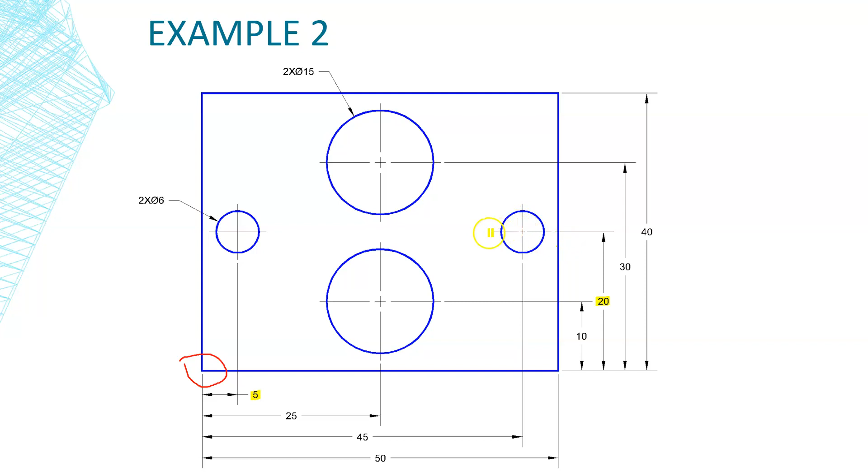Because you can see that we should be able to get to all of our rectangular dimensions without any problem. So if I wanted to put in my first circle, for example, I can see that that is actually a positive number. It's going to go 5 to the right and go up 20. Now, this is one of those things that you kind of learn throughout the course of drafting, is that anytime you see that there is a single number here, that number is implied to be extended to both of these. And sorry that my line is crooked.

And it's going to be the same with this number 25. That extends actually up to this circle that's above as well. So you don't really need to put all of these extra dimensions on your drawing saying that, hey, I have this over here and this over here.

Another common practice that you're going to see is the use of the diameter symbol and 2x in front of it. So the 2x means that no, it's not a multiplication thing. It's saying that we have two of those. We have two circles that have a diameter, and that's that funny looking symbol here, that has a diameter of 15. So these two big circles here are going to have a diameter of 15. And then you have it again where it says 2x, diameter 6. So we have two circles with a diameter 6, and those are your two smaller circles.

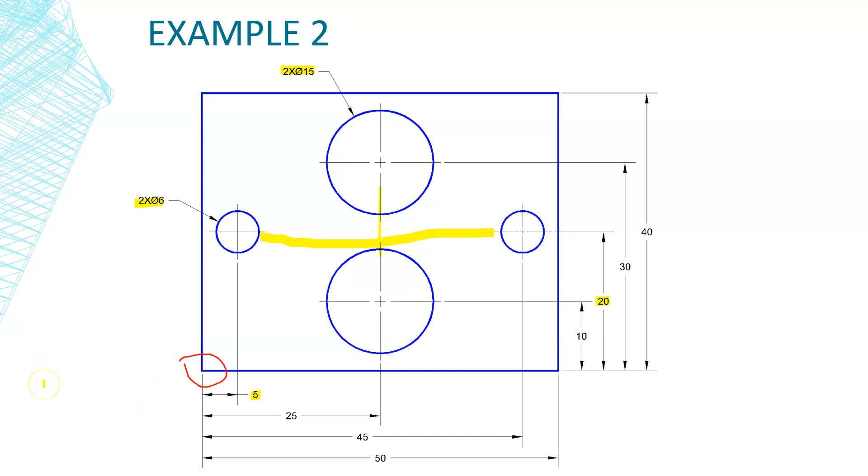All right. So enough of me going ahead and explaining this. Let's go ahead and switch over to AutoCAD and get started. Okay, so let's go ahead and turn our pesky grid off, which is something I usually do. Let's turn that off, and I'll turn ortho on. Now remember, like I said in the intro here, I do not want to start at 0, 0. But we can always manipulate that UCS to put it anywhere we want just to make the drawing easy.

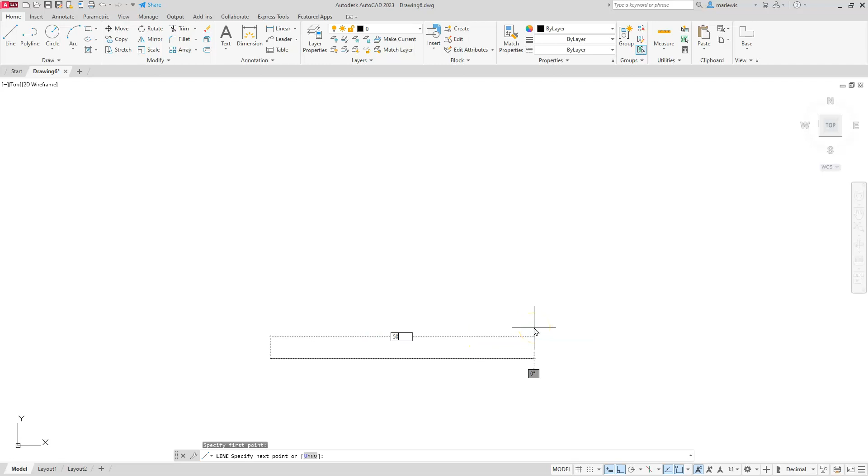So let's start with the line command. Click my start point. I'm going to aim this direction. Make sure you're getting that preview. Type in 50. Flies off the screen. I'm just going to scroll backwards with my mouse. I'll go up 40. To the left 50. And then C to close. So remember that after each one of those numbers I'm typing in, I'm hitting the enter button.

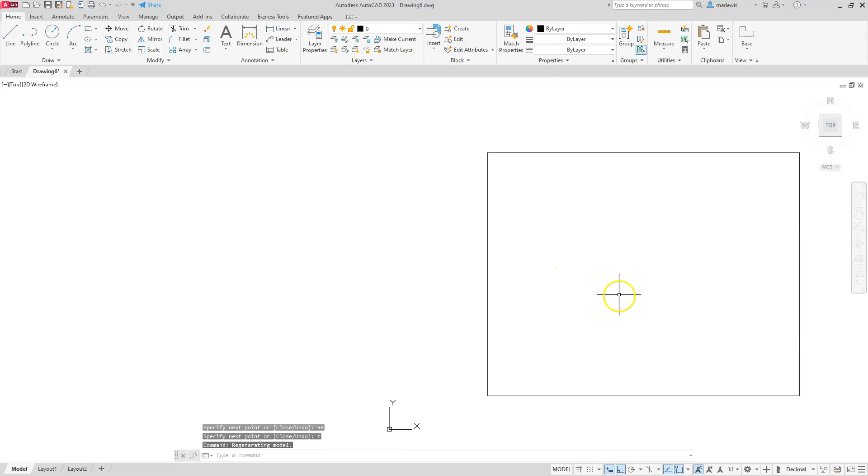All right, next let's go ahead and locate our circles in. So we want to make sure first of all that we define where our 0, 0 is, which is going to be here at this corner. The way we move our UCS is select it.

Make sure that you're not in any command first. Select the UCS, select the square, and then click it at that endpoint. I'm going to be using a circle with a diameter, so you can choose it here in the drop down, or you can go circle, and I'll do that for the next two circles. So these first two circles I will create using this toolbar, and the next two I'll try to use with the command.

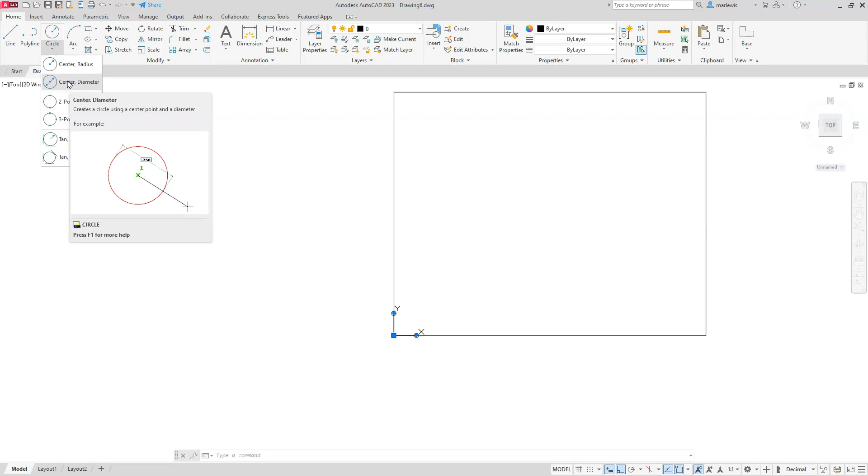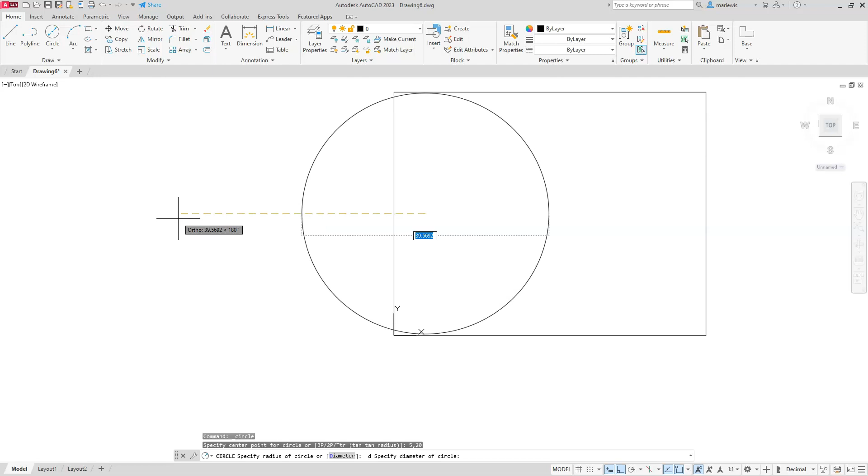Alright, so circle center diameter. It's asking me the exact location of it. So we know that we moved our UCS, so we don't have to worry about trying to figure out or manipulate anything. I'm just going to type in my absolute coordinates, which is 5, 20, enter. And then it's going to ask you for the diameter, which is 6, enter.

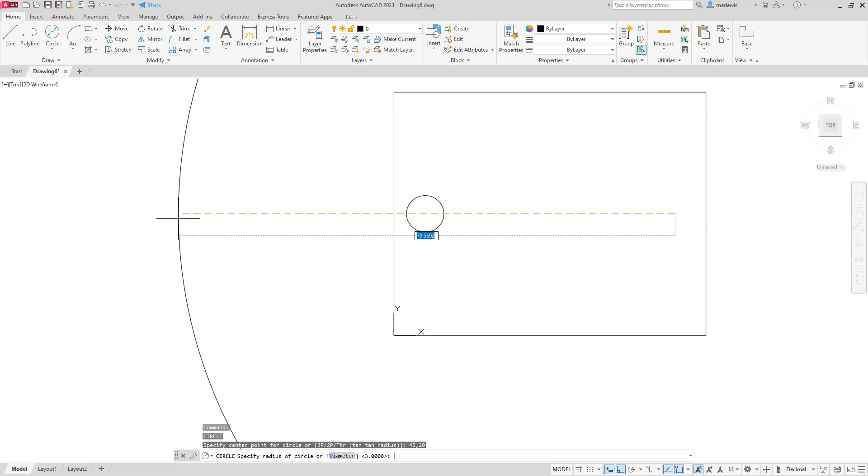Now, if you want to repeat the same command that you did just a second ago, you don't have to do anything but hit the enter button on your keyboard. That takes us back to the circle command. I'll go ahead and type in my coordinates, which is 45, 20, enter. It's the exact same diameter as my last circle, so I'll just go ahead and hit enter. And then I've completed those two circles.

All right, now I'm just going to do it by using the circle command if I was to type it in on the keyboard. So I'll type in C, enter. That takes me to the circle command. It's asking me to locate my first circle. That location is at 25, comma, 10.

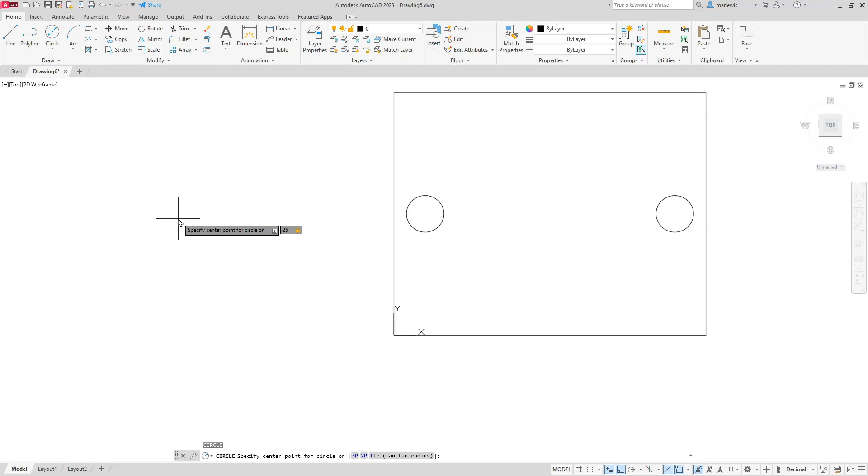Enter. Now once I'm here, you can see on my command line it's asking me for a radius. It says specify the radius of the circle or diameter. I can physically click on the word diameter, or up here in the graphics area, I can just type in D, enter, and then that'll switch me over to the diameter mode,

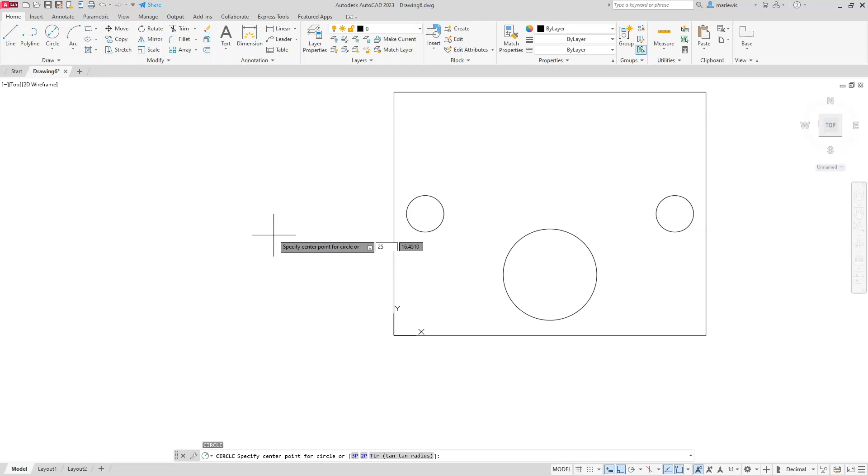and then I'll type in 15. I'm going to do the next one the exact same way again, just to give you practice. Although I can just hit the enter button and carry forth like I did the last time, I'm just going to go to C, enter. Give me the absolute center location, so I'll type in 25, comma, 30, enter.

And then I'll type in the diameter, right? So remember, if you look down on my command line, this is the most important thing. It says specify radius. I need it to say diameter, so I'm just going to type in D, enter. Now it's in the diameter mode, and you can read that down here as well. It says specify diameter, and it's the exact same diameter as before. I can type in 15, enter.

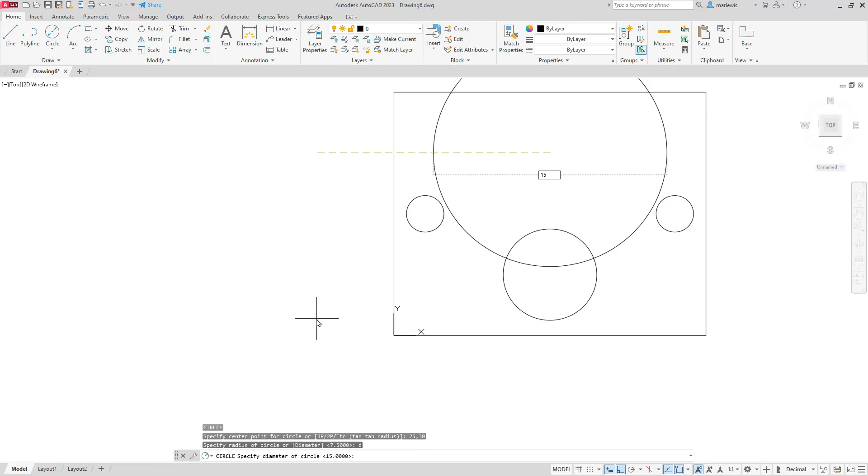Last thing I need to do is move this UCS back to the world coordinate system. So I'm going to select the drop down, select WCS, and now you can see that my drawing is completed. I have my circles done, and everything was done rather quickly, and I didn't have to go through any kind of, I guess, weird things.